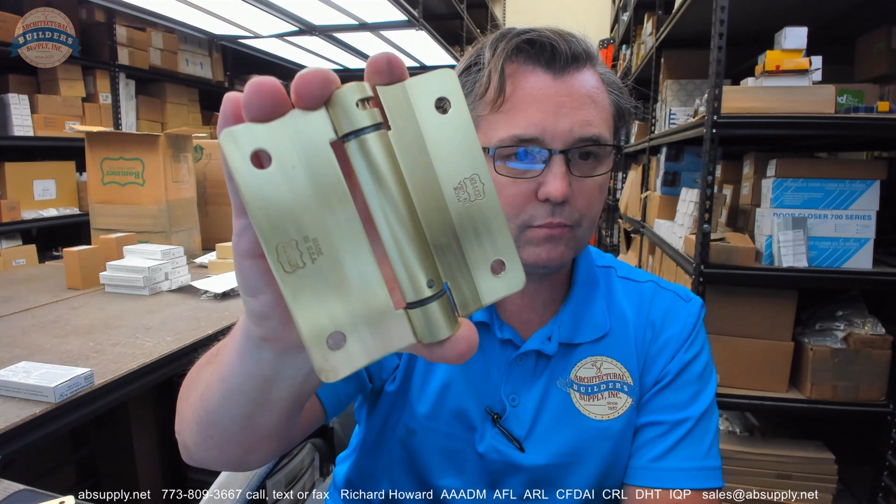This video is to bring you a closer look at the Bommer. This is their part number LB1002-400-H-606. Here it is. Very nice looking piece of solid brass hardware that we're seeing here. This would be considered a full surface. It's a lavatory hinge. It's not a typical full surface hinge because of that elegant, graceful swag that they've done here on the hinge leaves.

Okay, this is used in surface mount applications, to be sure. This would be very typically used in a lavatory application. And it's a hold open because the way that this hinge has been constructed, when you apply tension to it, the leaf is going to naturally sit like that. The door is in here. Okay, so it's hold open.

When you occupy the lavatory, you'll push that door closed and then latch it. When you unlatch it, that door is going to swing back open. Okay, and we're going to get to the installation instructions and show that to you. So this is an LB1002.

It's a lube bearing hinge, which means it's a 3-knuckle hinge, and their single-acting spring hinges are all LB or lube bearing, a maintenance-free type of construction from Bommer. The 1002 specifically refers to this type of hinge. The overall design of the hinge is the 1002.

The 400 in the part number means it's a 4-inch tall hinge, and that it would be 4-inch wide as well. Okay, so 400 means 4x4. The height is the first dimension. The width is the second dimension. Not that it really applies to this application, but when it comes to hinges in general, the height and then width absolutely apply. The H means it's hold open.

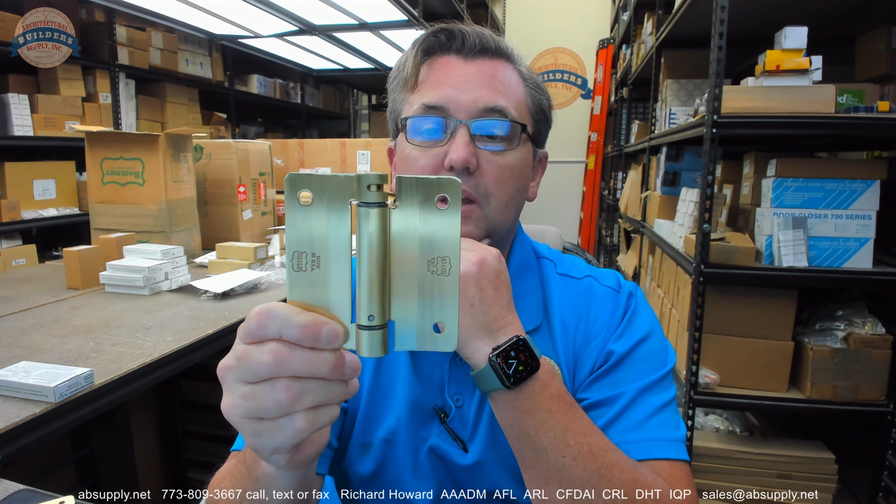This has been put together in such a way where when the door is not latched, it's going to be held open, and I'll demonstrate that in a second. Normally, if you were going to do a full surface hinge that you wanted it to open and then the door close, it would be a hinge like this, but you would need it to be basically a reverse action of this, so that when the hinge went this way, it would automatically close. We're going to touch on that function as well.

606, that means three things. It means it's made of solid brass. That's number one. Number two, that it is in a satin finish. That is a satin brass finish that you see. Number three, it has a clear lacquer on it. Okay. There you go. Okay, also, what else is included will be 2

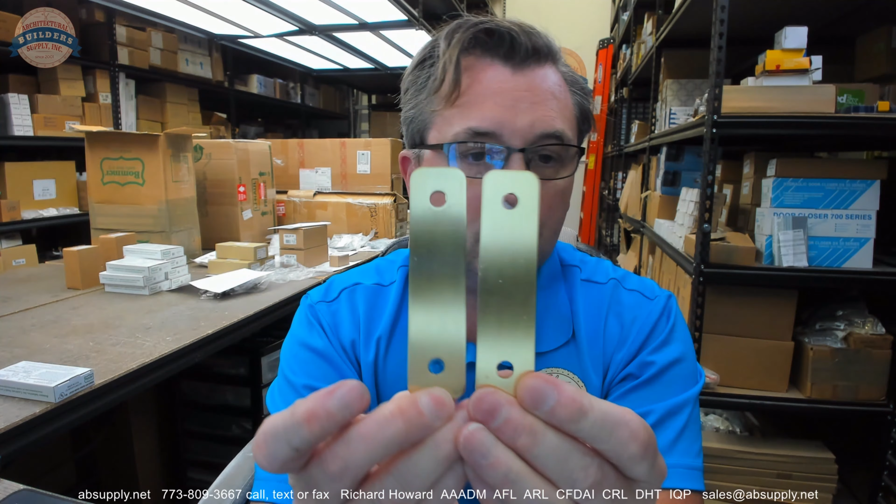mounting plates. These plates are meant to go on the opposite side of where you're going to attach your screws. That's so that your partition, which is probably laminate over particle board, as you tighten those screws, you don't want to crush anything in. That particle board is very poor at dealing with forces perpendicular to it. So you could crack that material. Commercial restrooms are common areas of being vandalized and things of that nature. So these plates are there to help you mitigate that problem.

Also in the package, you're going to get a total of 8 of these female portion of the binding posts with slotted one-way screws. Some people feel like that's not a security product. I assure you that it is. It is a lot easier said than done to be able to get that screw out with a slotted screwdriver. I've tried. It doesn't happen. At least I haven't been able to get it to happen.

Diameter of the barrel on that, not that it matters, but here we go. 0.25 inch diameter here. Diameter of the head, 0.428. 0.428 diameter of the head.

You're going to get a total of, for each of these pieces of threaded rod, these might be 12-24 or 10-24. I'm going to go with 10-24. You'll get 4 each of these. They're just simply different lengths, because they're not asking that you specify your door thickness.

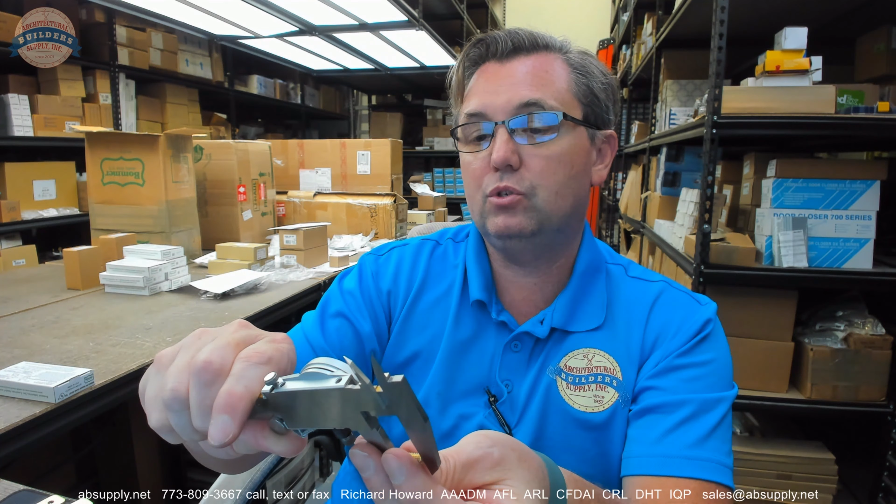The shorter one is 0.369. The longer one is 1.13 inch. The length of that post, 0.443. So 13/16 on just these two pieces. And then you're going to throw this, that's basically 1 1/8 inches. You're going to be able to get yourself installed onto things that are thicker than your standard partition.

Finally, for every hinge that you order, you'll get 1 tension pin, and that's how we're going to go about setting the tension. There are installation instructions included with the package.

I don't believe I own a set of cheaters or reading glasses that would ever allow me to actually read that. I think I do, but they make you dizzy the second you put them on.

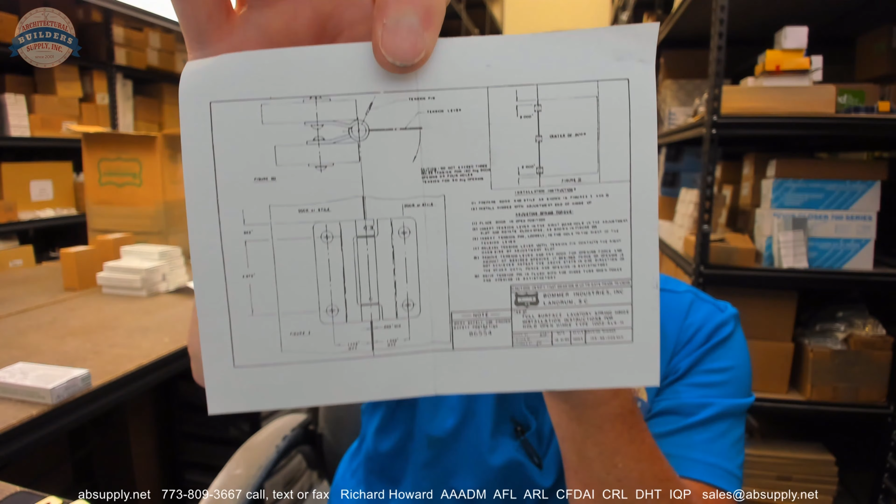Luckily, they're linked to down below, and we're going to go over the installation instructions of this. Actually, these installation instructions are different than the ones linked to down below. Let's take a look at that.

Yeah, these are inherently different. And I have discovered the reason why. The ones that are there are for the standard LB1002 series. The ones that are included with the hardware is the H, the hold open version. That's inherently a different hinge. And by the time you're seeing this video, we will have the correct installation instructions listed there for the H version. They're different. They show you differently how to set that tension. So we're going to go through that now, and those are linked down below.

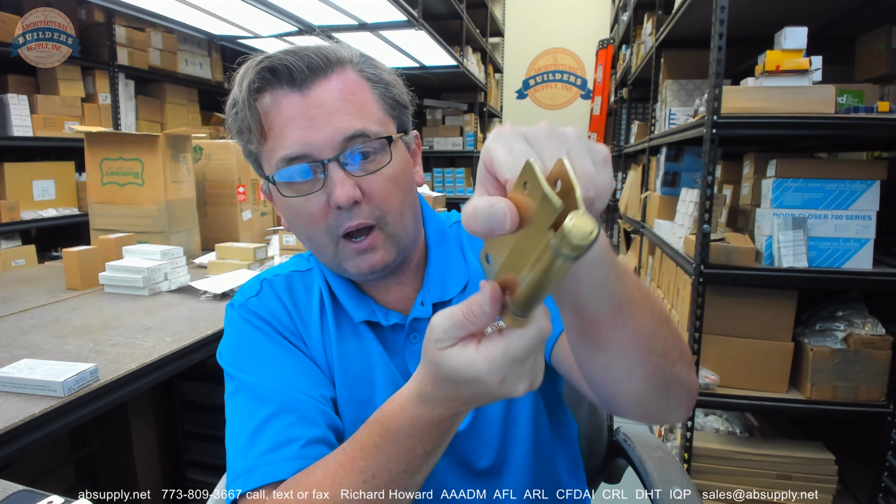But what they want you to do simply is, your door is going to swing in. So this is the perspective from the inside of the partition. You'll notice your tension collar is pointed towards the top of the door. They want you to put the door in the open position, and they're really showing that installation instruction where the door is open to 180 degrees. That's pretty unusual in lavatory hardware. Maybe not in this lavatory that you're installing it in, but you're probably only going to 90 degrees would be my guess. But they're showing this in this sort of fashion. Okay.

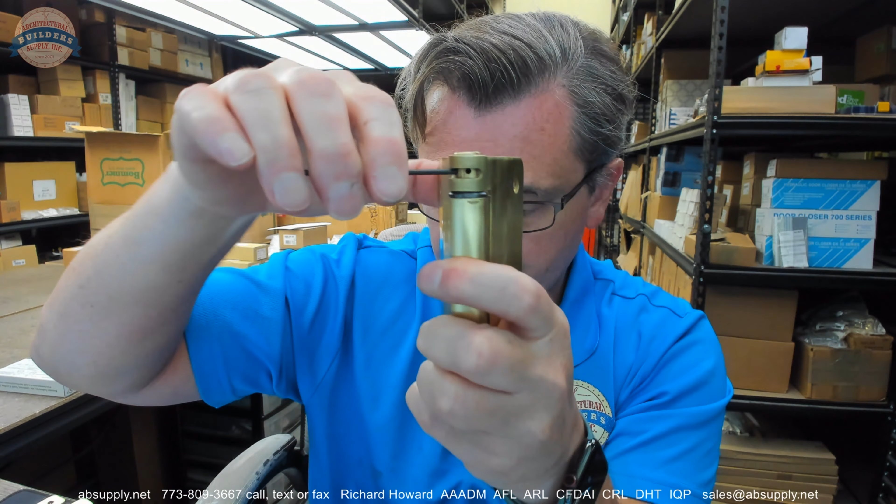So again, you're on the inside of the toilet compartment. Door is now open. Okay, 90 degree. So what they want you to do is, when you are standing on the inside, when you have that door open as far as it will go, you're going to access the tension collar from the backside. That tension rod is going to go into the first hole that you can see there, and you're going to turn it clockwise. And into one of those new holes is what you are going to insert the tension pin into. Now let's demonstrate that. So the tension rod goes in, you turn it clockwise, then you're going to install that tension pin into an available hole. Okay.

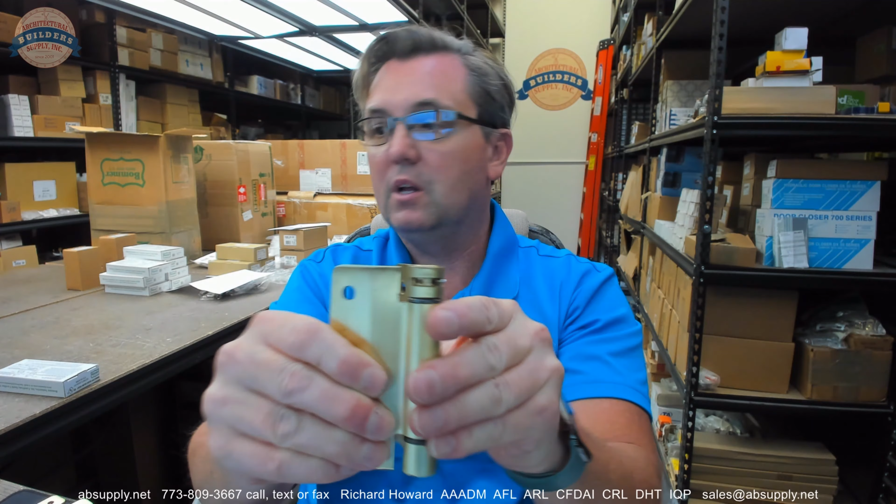I've got that tension pin seated all the way down. What I was struggling with earlier is that this tension collar is crossbored all the way through. I had the tension rod stuck in so far that it was preventing the tension pin from going in any further. And you want that to be as close to flush as possible. You don't want that projecting off any more than it needs to be. Just basically one hole of tension has allowed me to really get that door firmly, you can't really see it, but firmly in the open position. I take it any further, it's under some good spring tension. So that will definitely keep that door in the open position.

So right now I've got it mounted. That would be closed, 90 degree. If it can swing further, then there you go. Okay, and that's how we set tension on this. That is according to the installation instructions. Do not exceed 3 holes of tension. It does say that somewhere. If you're going to 180 degrees, I don't think you're going to need much more than 1 hole of tension, well, probably 2 holes of tension would be my guess. I do want to take a closer look, and I do have bigger glasses here, at the installation instructions to make sure we're not missing anything. So by the time you're seeing this video, this will be uploaded down below.

Insert the tension lever in the right-hand hole in the adjustment slot, step 2 by the way, and rotate clockwise, as shown in figure 3. Okay, figure 3 is at the top. Insert the tension pin loosely in the hole to the right of the tension lever. Release tension lever until tension pin contacts the right side of the adjustment slot. Remove tension lever and check door for opening force and amount of desired opening. If desired force cannot be achieved, if it's not closing, repeat the above process.

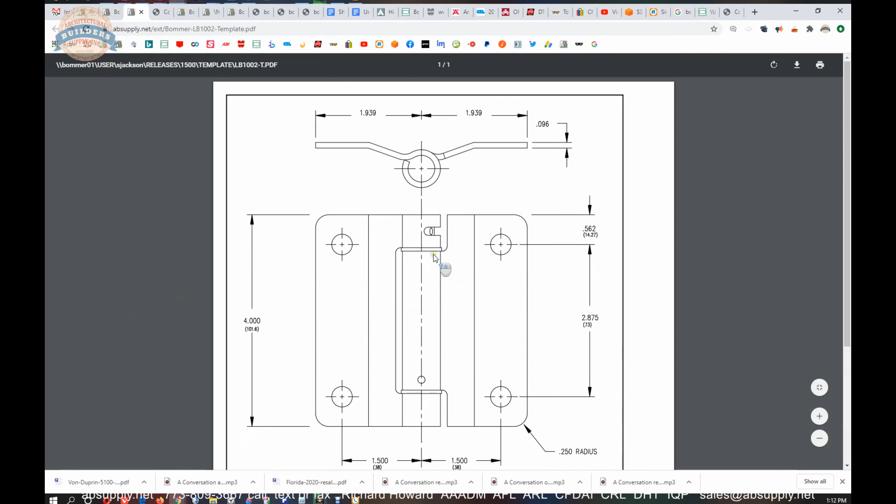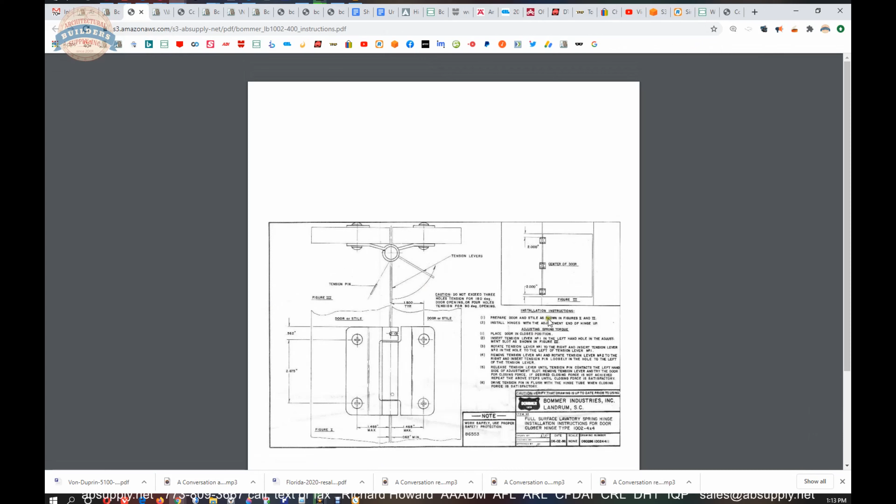Questions regarding the dimensional size of the hinge beyond what we've already addressed can be reviewed here. There's also a link to the installation instructions, which are here, and these are not the correct ones at this time. The correct ones are what I held up prior. We've gone over it. It shows you where to place the hinges. That is the same on both documents. By the time you're seeing this video, we'll have the proper document uploaded.

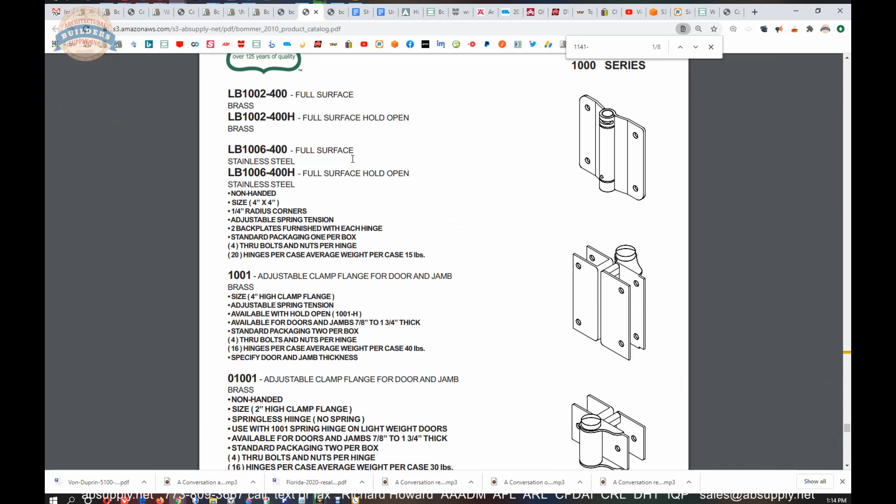There's also a link to the cut sheet. That's a single page coming out of the manufacturer's catalog that shows the LB1002 in both the standard and the H version. Brass base material. They're not saying much about it other than that. Clamp style version, a half-size clamp style version, then a more traditional style full surface spring hinge shown here.

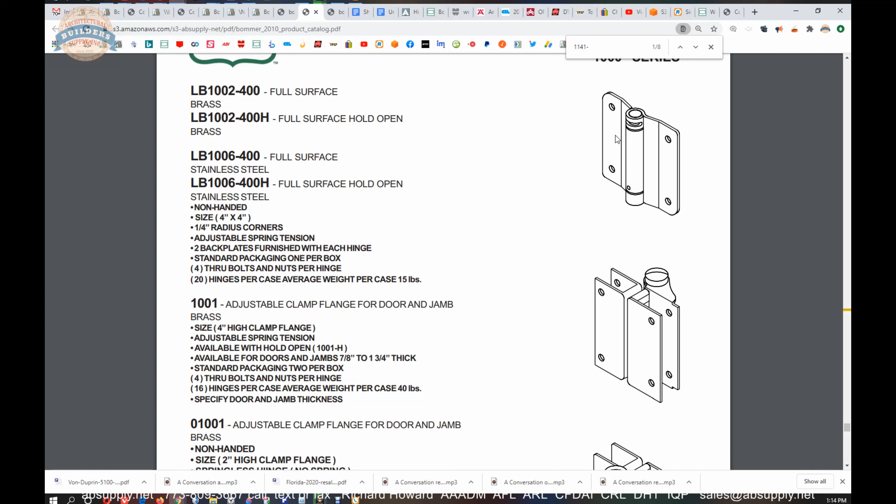Okay. Very common. That LB1002, I recently saw those at a very, very major, like the most major theme park in the state of California. And there's also one in Florida. They opened up a recent new, very large attraction, the largest in the history of that park's expansion plans, and it has recently gone in full of these Bommer hinges, full of them. So that's your cut sheet.

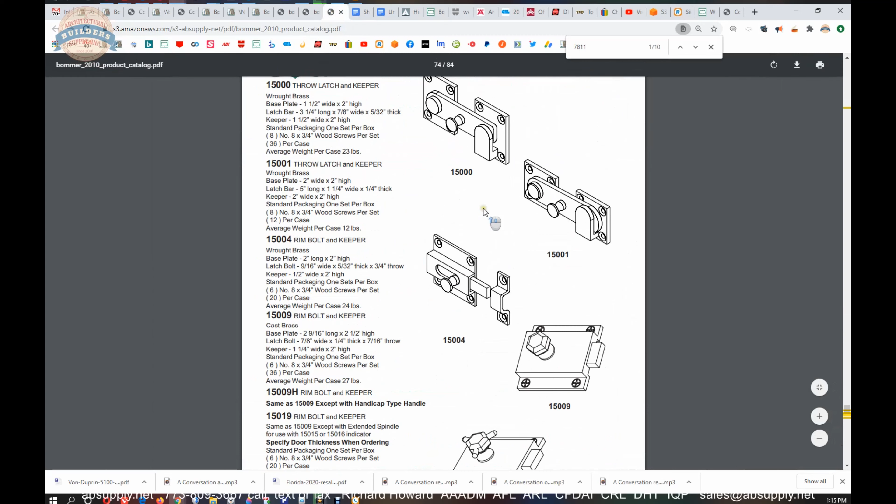There's also the product brochure. That is 5 pages showing all things lavatory hardware related from Bommer. I would certainly suggest that you review this, because if you're looking at this hinge, you might need other parts. And you might want other parts because you're hoping for an architectural finish. The previously mentioned theme park went with a particular base material and finish that suited their requirements.

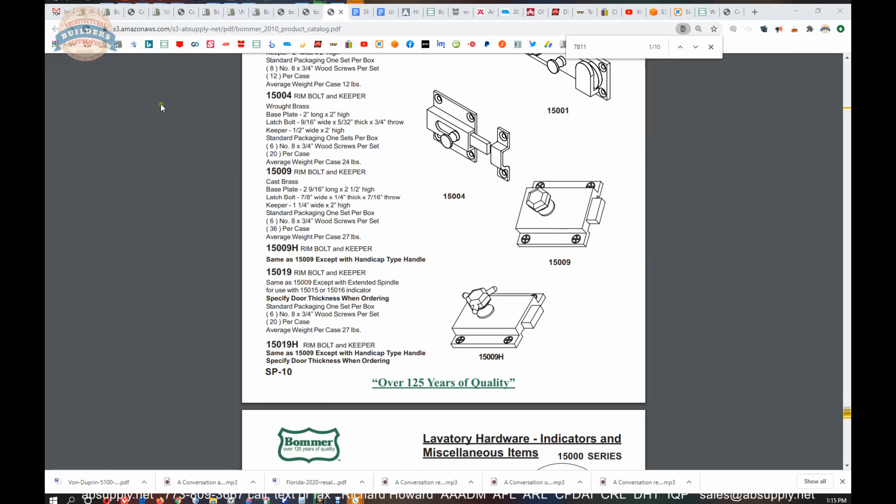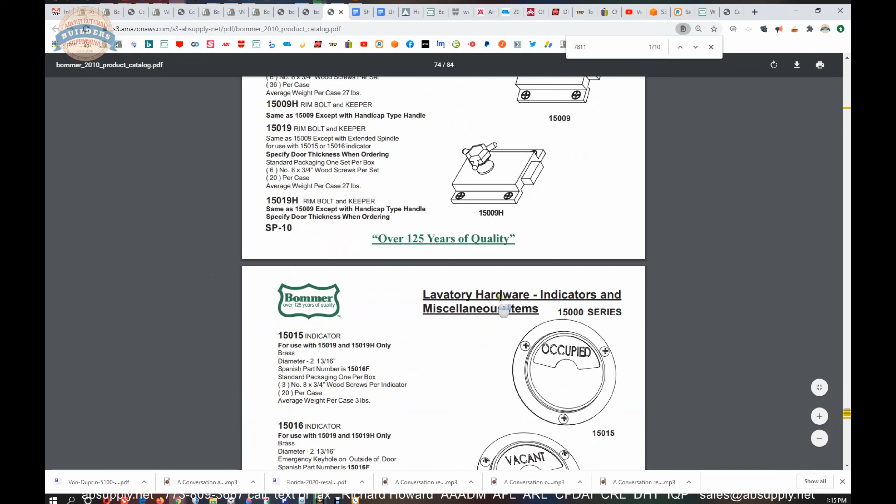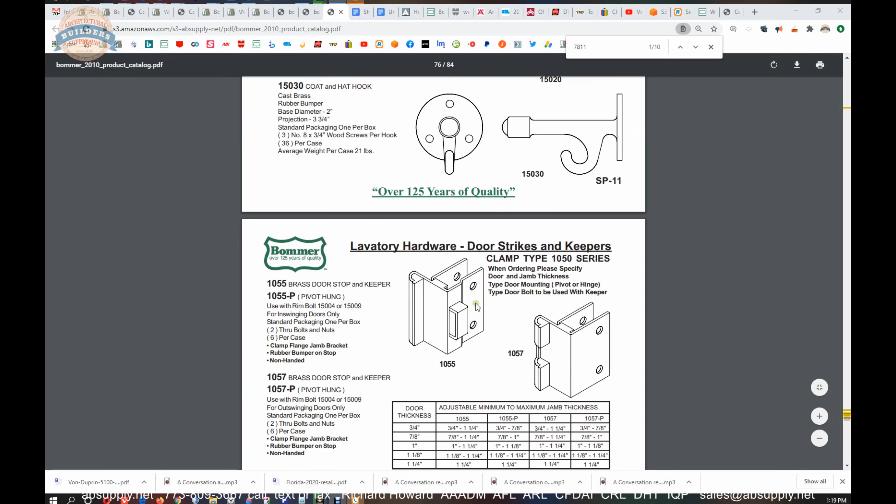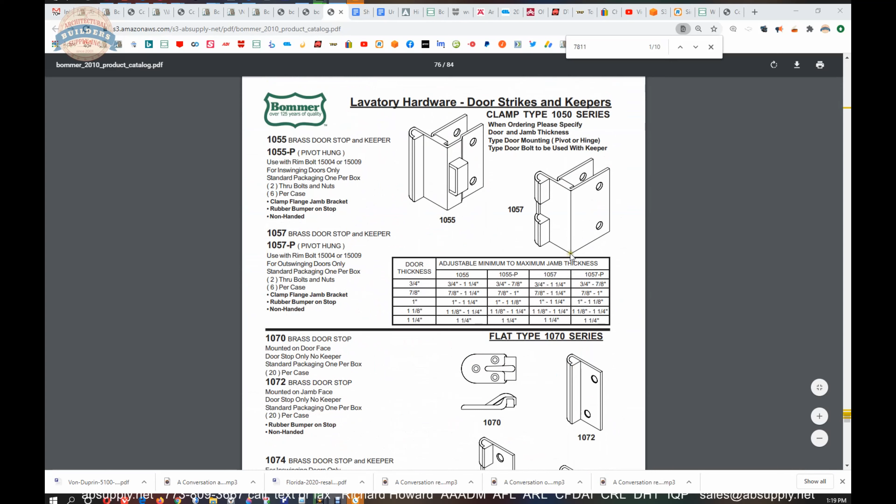Shutter bar style bolts, rim bolts slide and rotating, occupancy indicators, pull handles, door stops with integrated hooks, coat hook. Okay, so we've got the stop and hook. We have the integrated clamp style stop with the keeper for the rim bolts mentioned here. And by the way, those occupancy indicators go right on the opposite side of these items. Without the clamp style, without the keeper. Other stops with a keeper, as you can see here.

Partition mounting brackets: double flange, single flange, L shape, and U shape, all cast brass, and then pilaster cover and shoes if you need to dress up the bottom of that partition material that you're building. This would be the way to go with that material.

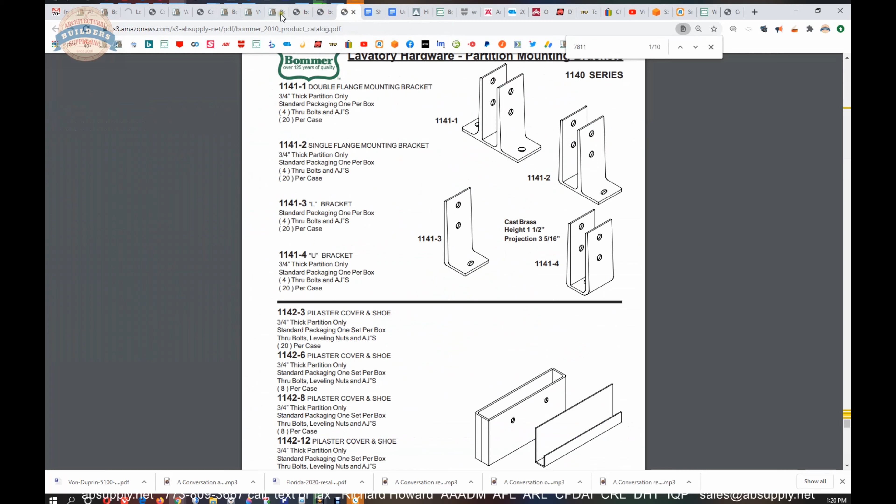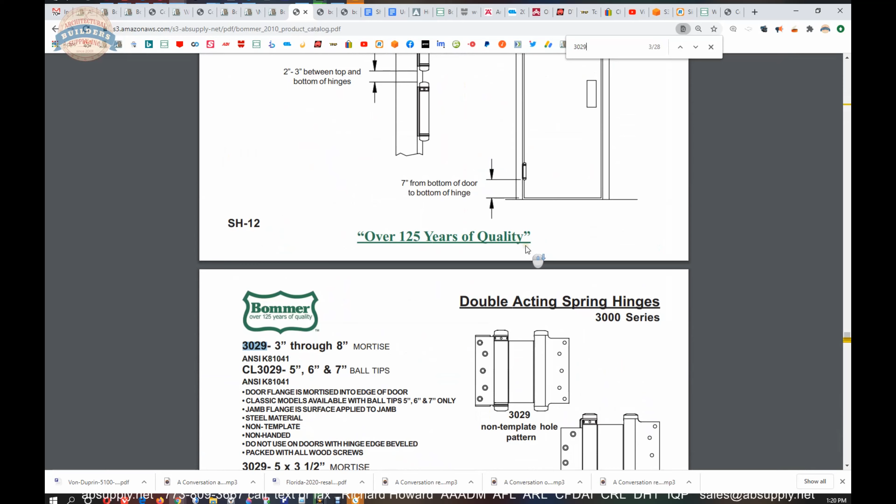If you're familiar with Bommer, it is probably because of the 3029 double-acting spring hinge, a very common device, and countless other single and double-acting pieces of spring-loaded hanging hardware from Bommer. New York City is absolutely full of Bommer material. You walk into an old hotel there, you're probably going to see Bommer hinges. Just tremendous, the offering. In business since 1876, founded by two brothers, Bommer.

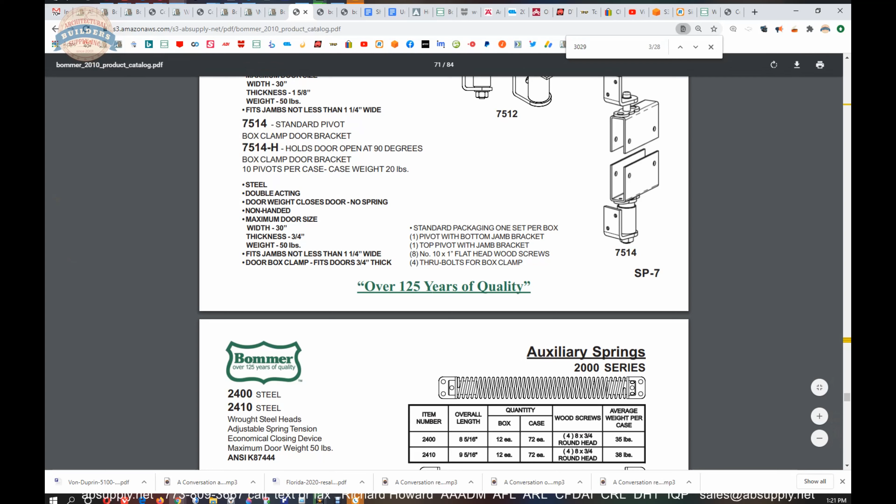I've been to their manufacturing facility and their plating plant, and I can tell you that I left with a substantially realigned understanding of just how involved and difficult and trying a process it is to make hinges. You think making doors is difficult? Make a hinge. Hinges are far more difficult. Let's wrap up this video on camera.

Now, in conclusion, you'll want to install this with the tension collar pointed towards the top. You can install it like this if you want. Just don't turn the tension rod clockwise in that instance. Turn it counterclockwise. So tension collar should be up. Doesn't matter if it's a left hand or right hand door. It just isn't really going to matter at all. This is from, obviously, the interior look of what you're doing.

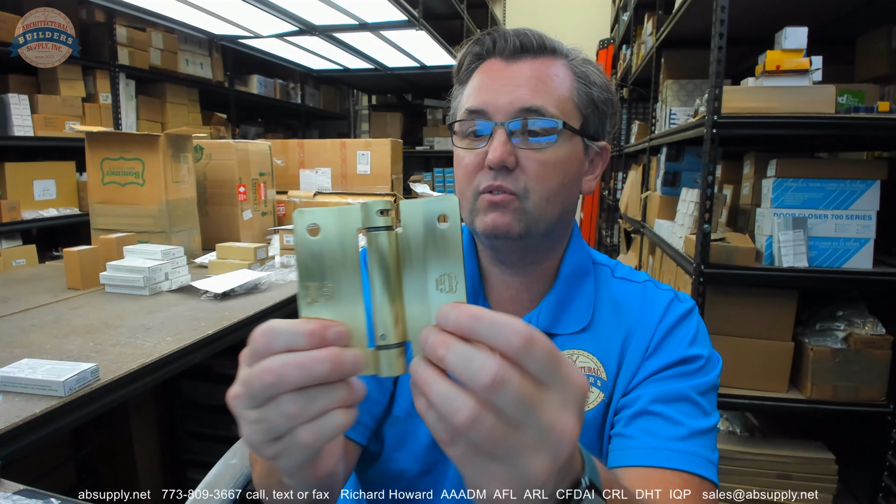If the doors were to swing outward, this would be on the outside. I've seen those as well. Very large restroom area with one stall. You'll see those swing out as well. I have seen those. Backing plate, definitely use these. I would use them regardless of what I was installing it to.

You could have a stainless covering over the particle board. No reason not to have that extra support when you're installing these hinges. A tremendous amount of force goes into not only making the door self-closing, but actually just carrying the load of the door itself. And every amount of additional surface area that you can gain is an advantage.

The last thing I'd like to point out to you, the Bommer logo. Right above it, it says Made in USA. A fact that Bommer is quite proud of, as am I to represent them. Other manufacturers' logos will have the logo and then say USA on that. Does not mean they're made in the United States. So if that matters to you, it does to some, it doesn't to others. My opinion is irrelevant. Be mindful that Made in USA is not the same as USA. USA can be part of a logo and not a statement of a country of origin.